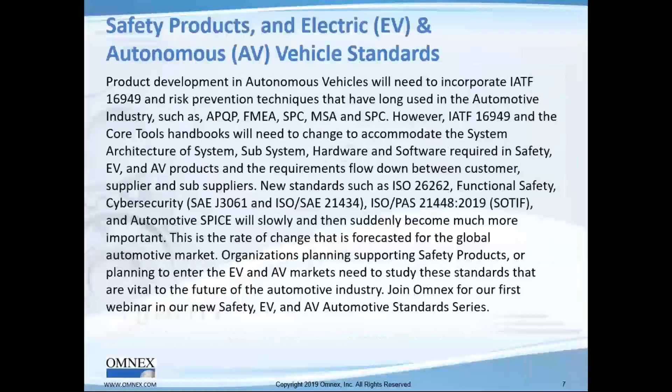As Miles mentioned, we're on many different committees, both ISO committees and many different automotive companies, and we pride ourselves in being part of all the key standards development happening in the automotive industry. So you can divide this presentation into two halves.

What I'll try to do is talk to you about what is happening globally and what is forecasted to happen globally in product safety, in products that have safety in it, electric and autonomous vehicles, and then we'll touch on AV and EV basics so that we understand this product, so you understand a little bit more why cybersecurity is very important, why functional safety is very important, why ASPICE or software becomes suddenly important.

And then what we'll do is spend about half the webinar talking about the standards, what we call the 7 pillars of EV and AV at Omnex. All right, let's get started.

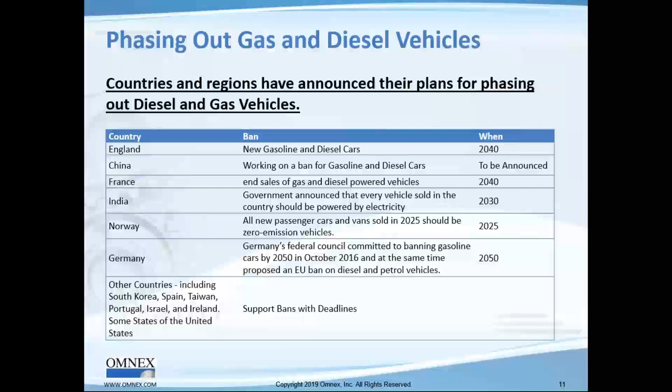Electric vehicles really is what the countries are asking for, and this is what set things off, so much so that you'll see in the news GM has announced they're going all electric, and they've given a time scale, which I'll share with you. Volvo, Porsche, and Volkswagen—as soon as you see GM, one of the largest car makers, and Volkswagen, one of the largest car makers, talk about how the combustion engine is at its very end and they're going all electric, it sets everything else into motion.

So here are the EV targets by OEMs. You can see from BMW to Volkswagen at the very bottom, and Volvo, what they're forecasting.

So by 2030, the thought is that a significant part of the car market will be electric.

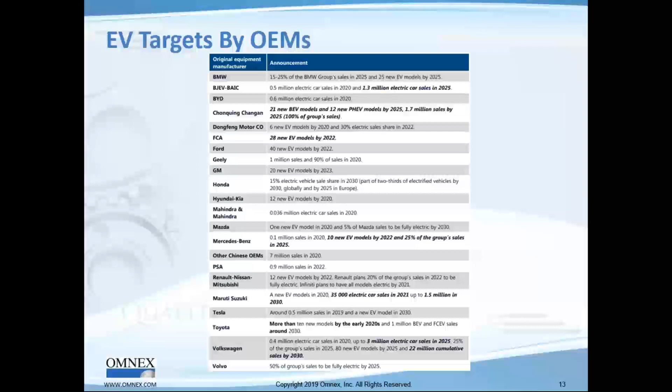Okay, let's move on. What has happened? What is happening currently as we speak? Something that's been going on for the last 10 years, and really it is the amount of safety that's come into the car. Part of that is this announcement between the 20 largest OEMs and the Department of Transportation. It is a commitment that by 2022, all the car makers will be putting automatic emergency braking into the car.

There's a lot of other technology that's coming in, which I'll share with you midway into this presentation, that has already come, and then of course much more is planned to come, which I'll talk to you about. You can also see the idea of backup cameras and the car stopping so that it doesn't run into children or senior citizens.

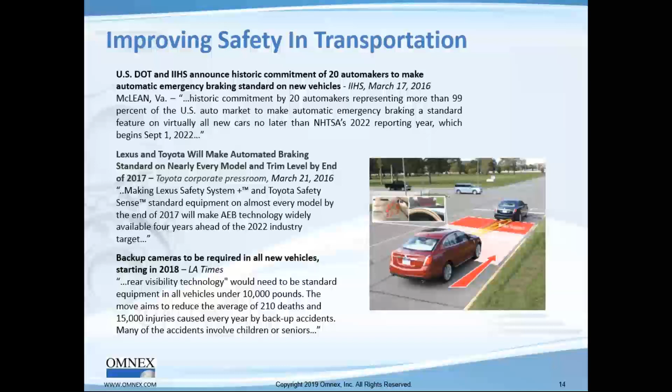So improving safety in transportation has led to a number of what they call mechatronic features in the car, which is the hardware and software. So which then leads to this slide that talks about the content of the car going from about 33% to about 50% of the car being hardware and software by 2030.

Do you see this? You see how it has crept up on us. In fact, I was doing a lot of work in the semiconductor industry, and it was slowly adding on more and more software. So much so, I thought the scope of, at that time, ISO TS 16949 needed to say hardware and software. And then, of course, we all had to audit software as a product in the ISO TS 16949 audit at that time.

And that's what's really happened in many of our organizations, and I have many good companies listening to my talk here today. In all your organizations, where we're doing quite a few ASPICE assessments, we're finding software is a little bit of a stepchild. It is outside the purview of your new product development process. Well folks, hardware and software is here to stay, and the headcount is going to keep on increasing. So I would imagine by 2030, half the organization will be hardware and software.

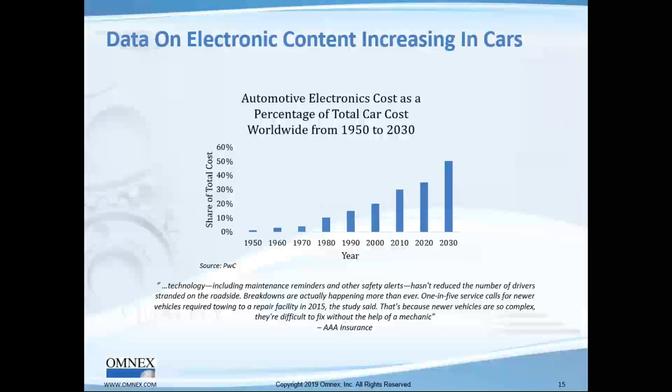With hardware and software becoming larger and larger, and especially software, and I told you it is really very neglected, you talk about distributed development. We have hardware being developed in one part of the world, software being developed in one part of the world, the testing happening in a different part of the world. No wonder we're having so much software failures.

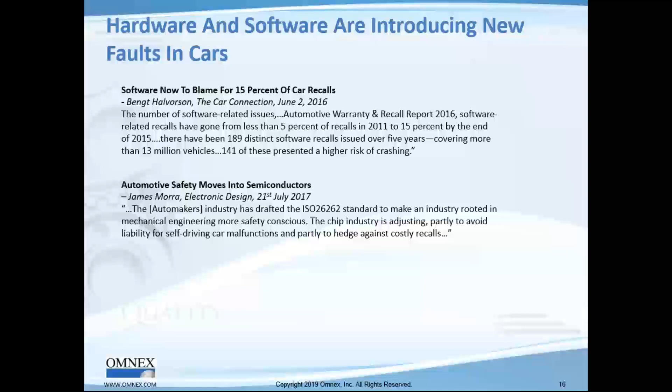And verbally, talking to the OEMs, some of them tell me up to 50% of the warranty today, when they look at the root cause, it really goes to software.

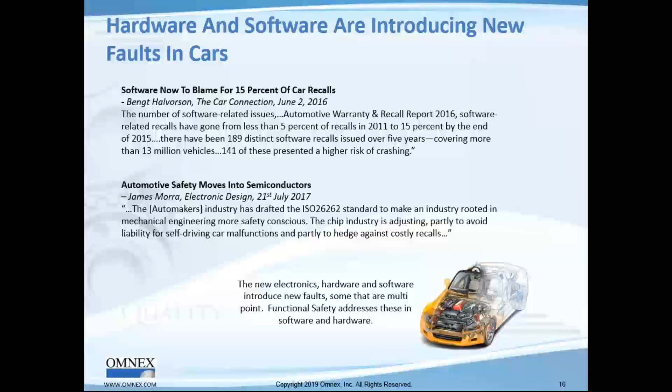So in terms of failures, what we're talking about is mechanical failures with pretty much single point failures. With the advent of hardware and software, suddenly you're going to be seeing what is called multi-point failures. Something that you may not see by itself, when you put it together with something else, you'll start seeing multi-point failures, where if this happens and this happens, then it'll fail. And so that's why we have new tools coming into the automotive industry, and hardware metrics, to handle these multi-point failures that we didn't used to have as much of before.

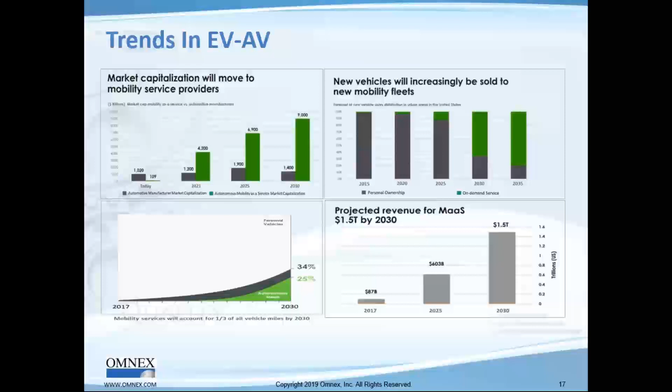So what will happen? First, you're already seeing electric vehicles in the market. You're going to see more and more of the electric vehicles in the market. And at some point, cars will go autonomous. Even if we go level 4 autonomous, I think it'll lead to what is called MAAS, or Mobility as a Service. I took this out of, so currently Omnex is presenting in a number of autonomous car conferences, and we're participating in it because we want to be at the leading edge of the changes that are going to happen. And it's huge changes that are happening.

So I took this out of one of the presentations. It's in the bibliography of my bigger paper. But I don't quite believe the amount of penetration is as much as they claim, as you can see here.

This idea of new vehicle sales, where they're saying about 33% or so is going to be on-demand service, using an Uber or a Lyft, where people won't own cars. The idea is, if you're able to call up a car and everything happens automatically, they'll dispatch a car without a driver that sits at your doorstep, and you might use that car for the next 2 hours, and then give it back.

What this presenter was trying to show is that the market capitalization, or the availability of capital, is going to shift slowly from the black, which is the car makers, to the mobility as a service provider. Yes, indeed, this is going to happen, but the speed depends on whether we can get to level 4. I'll talk to you about SAE level 4 in a second, and you can start seeing things like this happening. So there's a lot of change going on.

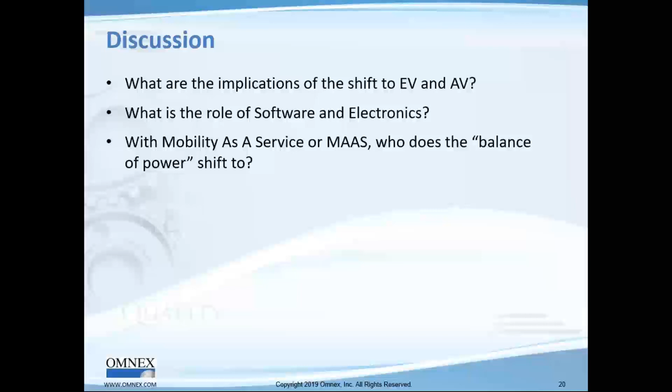But all of you need to be thinking the same. What are my competencies? What are the new competencies? What do I have? Is my background and my competencies sufficient? How do I change? What will be the balance of power? How will things shift? They're already telling you the market capitalization is going to go from the manufacturer to the MaaS. Need I say more?

How about the supply chain? Folks, I haven't talked to you about the standards, but the standards require—we already knew in mechanical cars with some hardware, mechatronic systems, we needed to keep in concert. Many of the problems happening are because we don't know how to do new product development with this distributed design and suppliers globally. In fact, we helped this large electronics company, a well-known icon, come up with the automotive platform, looking at all the places that needed to implement automotive standards just for this one platform.

Think of it as a couple of different circuit boards and a bunch of semiconductors put together. They had 300 different sites involved. I kid you not. If you're going to have 300 sites involved with doing hardware, software, and systems, the supply chain is very key. We need to take a good look at our supply chain—in this case, the design—how just a design is being done. Forget hardware and manufacturing right now, just thinking design.

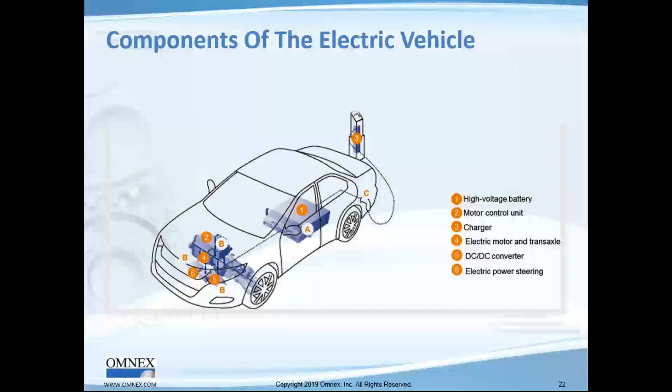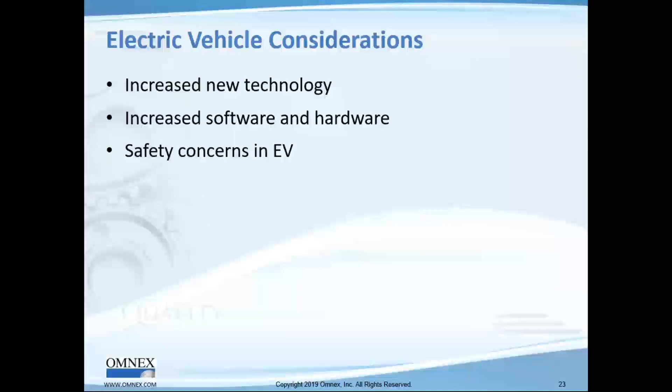DC/DC converter, electric power steering—and of course what this brings in is lots of new technology, increased software and hardware, safety concerns in the electric vehicle, cybersecurity concerns. The cybersecurity concerns come in as soon as you offer internet in the car, as soon as you connect via phone, as soon as you have software updates to the vehicle. All of these suddenly bring in cybersecurity concerns, supply chain concerns, which I already mentioned to you.

All of us leading to a number of functional safety issues, right? And these are some of the common functional safety issues: unintended acceleration—you understand an electric car can accelerate really rapidly—electric shock. In fact, the voltage, as...

We have done a number of electric vehicles and battery management systems here at Omnex. As the American plant manager of a Chinese battery manufacturer mentioned to me, showing me his 5 or 6 prototype batteries and battery management systems, he said, 'Chad, any one of these could take out a city block.' So we have these vehicles with that kind of power running through them, and we have to be aware why functional safety is very important.

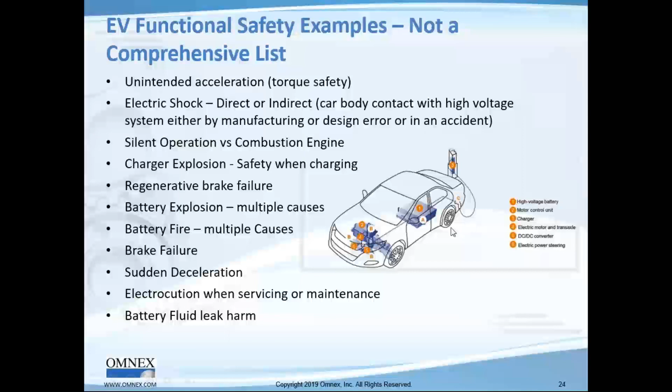Great, so let's continue. Next, folks, I had to be very economical here in what I add, only because it's an hour that we have. So let's quickly walk through—we have many key slides on the autonomous vehicle basics.

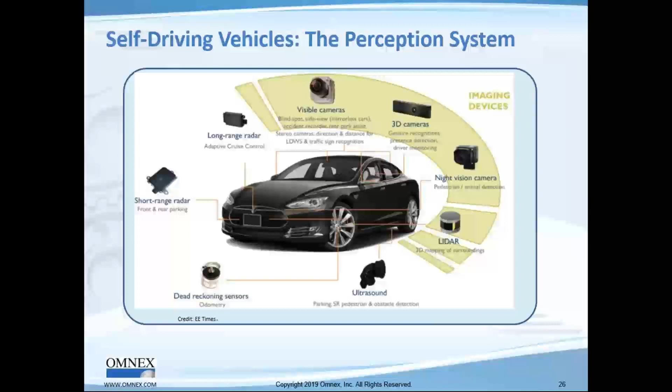Number one, we need to know that the self-driving vehicle has many different hardware and sensors—radars, cameras, lidars, night vision, ultrasound, dead reckoning sensors—all of this so that the car can go from level 1 automation to level 2, level 3, level 4, level 5. So here I've been referring to this SAE automation levels.

As Juan pointed out to me a few weeks ago, it doesn't say autonomous car—very carefully, the SAE committee called it automation. But of course, if we said automation cars, you wouldn't understand, so we call them autonomous vehicles. So what does it mean? We'll just say this as no automation in 0 and full automation in 5.

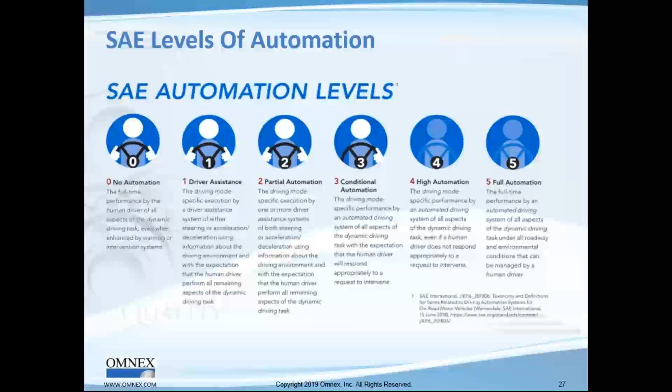I think we understand the extremes. How do we understand what's in between? This is a good picture to keep in mind to understand the difference between level 1 to level 5. The first one is that picture of the steering wheel, right? That's the one end, the driver is steering.

As soon as you hit partial automation and conditional automation, the car is doing self-steering, okay? Maybe at least even for a few functionalities. Then, of course, as it goes from level 4 and level 5, it is really steering by itself.

And then, who is seeing? Is it the driver or the vehicle? When you hit 3, the sensors and the cameras and the radars are good enough to manage by itself, but still, in the end of the day, when there's a contingency, which is plan B, the driver takes over, okay? And when you go to 4, you have the car doing all 3, and then level 5, all 3.

So what's the difference between level 4 and level 5? We'll use a term, it's the scope. It's the ODD. And ODD stands for Operational Design Domain. Okay, it's the operational design domain.

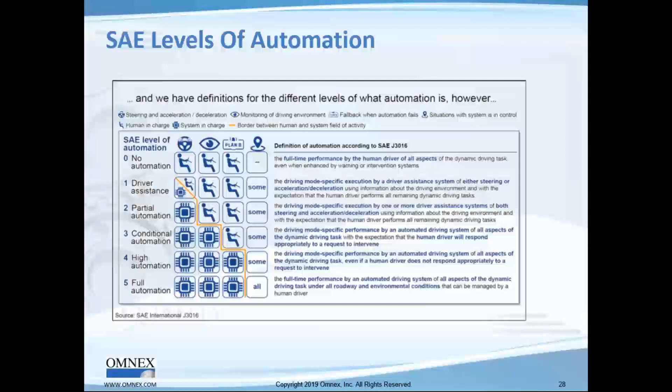And soon as GM is able to succeed in that, I think you'll start seeing things like the MAAS, or the Mobility as a Service. Soon as you do that, you can have these cars on one end, have people use them during the highway and then take something like an Uber or a Lyft from the end drop-off point to their homes. You can start seeing that. And then, of course, level 5 is when truly you'll start seeing mobility as a service.

Another way to look at this picture is to see the amount of hardware and software that is needed as time goes by. Of course, this is a slide looking at today's technology. I am certain there will be breakthroughs in the future, and maybe instead of 32 different sensors, cameras, radars, we'll go to much less in the future.

Okay, and I think Juan, we were discussing LiDAR being the most expensive of that, and how Tesla doesn't use any LiDARs at all. Right? That's right. The state of the art of LiDARs is probably the least advanced as compared to cameras and radars.

And there is still a lot of room for development and innovation, like Chad just mentioned. And I believe that in the next 5 or 10 years, we're going to have completely new redesigns based on just these lidars, because it's very new. Lidars are very new, in fact, in automotive it's new, but in other areas they're not that new. But you're right, in automotive it's totally new.

Folks, Juan is an expert. He's done a lot of work in hardware. And Juan, if you look at our 5-day certification course, we're coming up with a hardware, part 5, version of it. And the case study we're using is actually a LiDAR for functional safety.

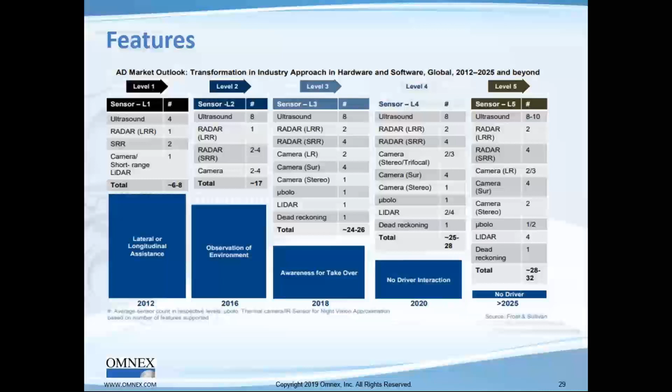All right, folks, let's move on. And this is the last slide, and maybe I've lost a few minutes here from our standards discussion. This is sort of the trajectory. You can see in 2012, we had things like blind spot detection, lane change assist, forward collision alert, and so on. And I get a good chuckle out of it.

So you can see here also level 2 in 2016. I don't see the automated parallel parking that I saw advertised a few years ago. In fact, I told you I just bought, I won't tell you which vehicle, top of the line vehicle, this car, and I looked for the parallel parking, automated parking.

They said they had it a couple of years ago. It never worked that well. And so this great car company... Really?

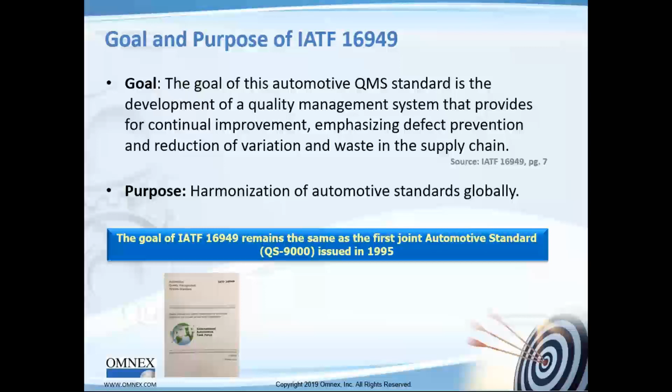4 out of the, we'll talk about 5 out of the 7 standards. Starting with IATF, all of you know the IATF. I'll just say this, with the advent of the new standards, IATF 16949 is going to have to change. How we manage suppliers needs to change. How we do change management needs to change. Traceability will change. Configuration management will come in, and so on.

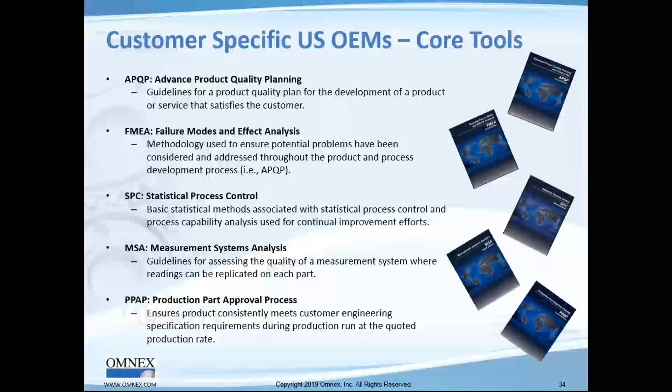And what else needs to change? The APQP and the PPAP processes will change. In fact, we are giving a number of presentations on this topic. Those of you interested in looking at where new product development is going with all these new standards, please email Miles, and we'll be happy to share that with you, including a white paper.

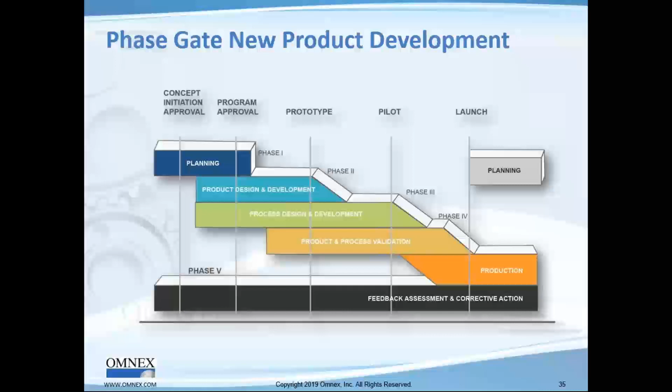So this APQP process, fundamentally you can see here, we never thought about the system architecture of system, hardware, and software in phase 2. We are not aligning, we don't have requirements flow down. We don't have testing flows up, or the idea of the V. I don't have time to talk about that in this presentation, but Omnex recommends satisfying the V using the linkage, of course taking the requirements into a DFMEA, coming up with the test requirements, and doing the testing in a DVP&R. And of course, folks, the requirements have a decomposition, so requirements flowing down and testing flowing up.

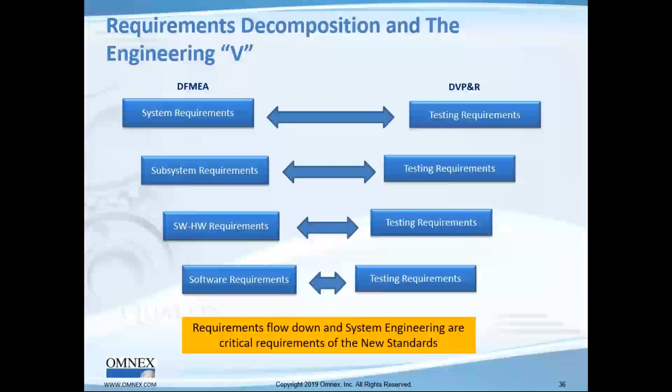Oh, I have to make a couple of points here. The idea of the architecture of system, hardware, and software in systems engineering is a critical requirement of these new standards. All right, let's get down then to talking about these 4 of the new standards coming out.

As I mentioned to you earlier, software and software failure is a big deal. So the industry is looking at Automotive SPICE, which is a framework for designing and assessing software development processes. And folks, I just did an assessment last week, and let me give you some thoughts here.

I'm going to say this company had maybe 150 requirements for this very key feature that they're adding into the car, and it's going into some of the top name brands, one which has already got it, the other one which is going to start first quarter next year. They had to redo half of the requirements, because when they went and looked at the alignment between stakeholder requirements and system requirements, they found it was inadequate.

Number 2, when they went to the testing requirements, 46 out of maybe 120 test cases had to get updated. So you understand then the implication, that's only one very small part of ASPICE, but the idea of the alignment, the review of the requirement, the review of the test cases, all of which are base practices, are part of the journey of trying to have better quality in software.

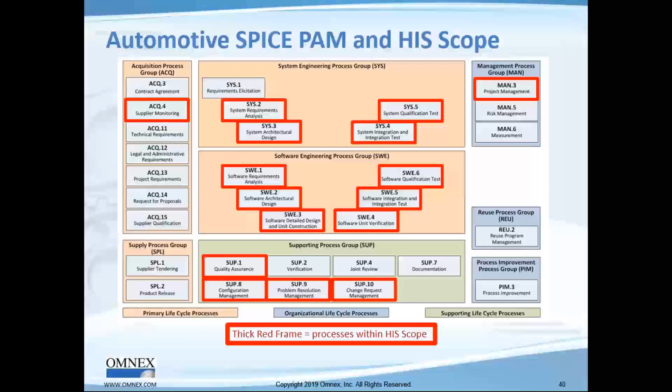All right, so let me explain this picture. There are 32 processes in ASPICE, and 16 of them are what is called the HIS scope. So typical OEMs are asking for the HIS scope and at least a level 2. Everybody would like to see level 3, but at least a level 2. So level 1, level 0 is nothing.

Level 1 guarantees those base practices. So there are something like 6 to 9 to 10 base practices for each of the processes, which you have to implement, and assessors come and assess. And then as soon as you put down performance management and work product management, you work to a level 2.

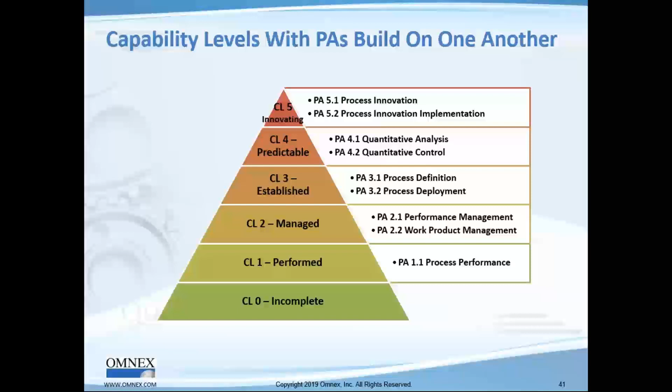Level 3 is when you have a standard deployment that will be tailored for every project in the company, you're at level 3. Okay, so up to a level 3 is what we have to strive for in the automotive industry. But right now, start with a level 1, move to a level 2 after that.

So that's ASPICE. What else do we have? The standard functional safety 26262 that came out in 2011. Omnex has been working with the standard since about 2009, and we did a whole e-car in 2009, and we've been doing a number of different projects in 26262 since then.

What is 26262? Well, they opened the scope of 26262 in 2018 to include buses and motorcycles, and they took the weight limit out of the automobile, but the scope is still E&E, okay? Electronics and electrical.

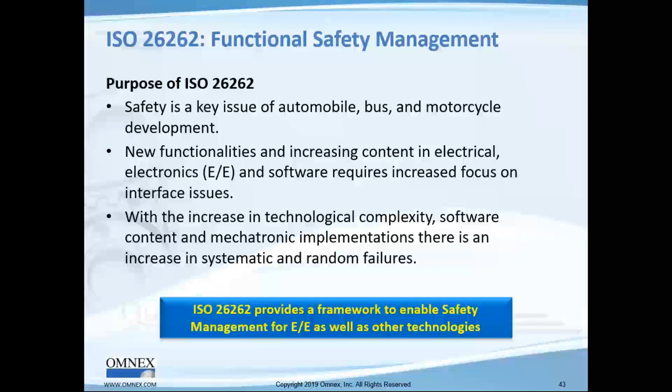And it's looking at safety. It's scoped down to safety, and the whole idea is with the increase in technological complexity, the software content and the mechatronic implementation, there's an increase in systematic and random failures. So this E&E-focused 26262 addresses hazards caused by malfunctioning behavior.

I will talk to you about SOTIF soon, but just understand it. You do a HARA, hazard analysis and risk assessment, and you understand the hazards. Out of that, you identify the ASIL levels and the safety goal and the safety requirements, and then it goes on. Otherwise, pretty soon I'll tell you the whole standard with the functional safety concept and the technical safety concept.

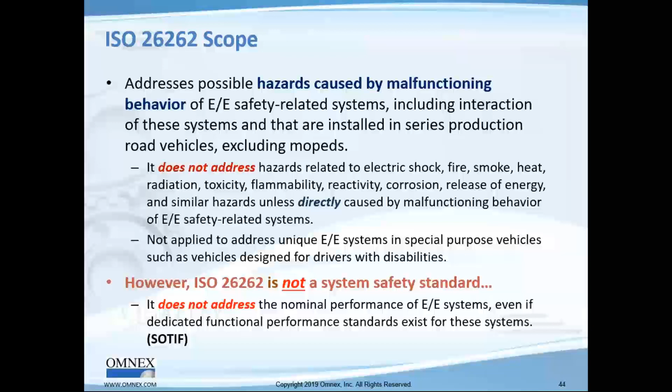All right, so 26262 is really part 2 and part 8, aligned with IATF 16949. Part 2 is general requirements, but the general requirements are things like competency management that goes with IATF. There's audits, called confirmation measures, okay? And it also brings in the safety case and so on. Very important requirements in part 2.

Part 8 has support processes, and the supplier management is called DIA, or development interface agreements, okay? So part 2 and part 8 align with IATF 16949, and then you have a concept phase where you identify the ASILs and the safety goals and the safety requirements.

From there, you have to identify the technical safety concept of the system in part 4, hardware in part 5, and software in part 6. And of course, ASILs can be decomposed. Pretty much you don't like ASIL Ds because ASIL D has such a high requirement in terms of hardware metrics. Oftentimes we have to do what is it called, ASIL decomposition.

You'll have to end up doubling your design—well, there's a cost because you'll have to put in a redundant system to get the ASIL D requirement. So frequently you do decomposition, at least to ASIL C, that we can do with less expensive parts. Of course, if you have no ASIL, it's cheaper versus ASIL C.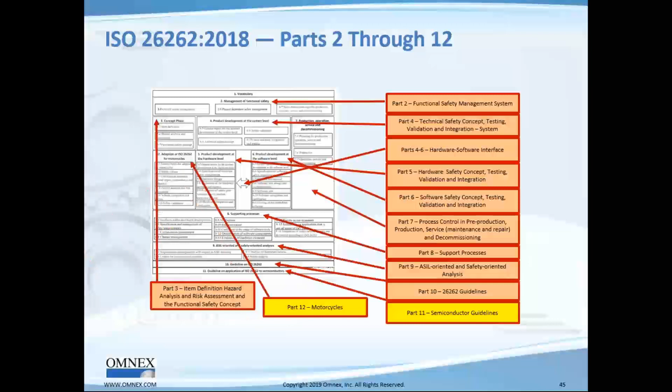Next, we have SOTIF. SOTIF deals with functional insufficiencies. Let me give you a good example in my new car.

Yesterday, I put my key in my briefcase, and it's got a kick sensor, and I did the kick sensor motion and the trunk opened up. So I put my briefcase in, I closed it, I couldn't open the door. Then I come back and use the kick sensor and it will not open. It did not sense that the key is inside the trunk. It's a functional insufficiency.

My Cadillac, which I drove and replaced with this new car, the flagship of this great company—the kick sensor designer had not designed for that. And I panicked because I didn't know how to get into my car. I actually called the dealership, and luckily I found a person who helped. Long story short, I got it opened, but you can see the kick sensor designer had not thought of this scenario. This is a good example that it's not just for the autonomous car.

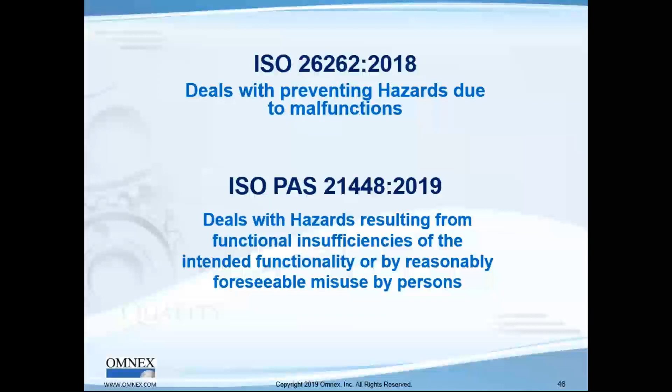You have to think this way for every little design, including a kick sensor design. And there's not only functional insufficiencies, but it could also be misuse, somebody trying to misuse it. So you've got to think of all that using scenarios. And so there's the idea of a scenario—a scenario is a set of actions.

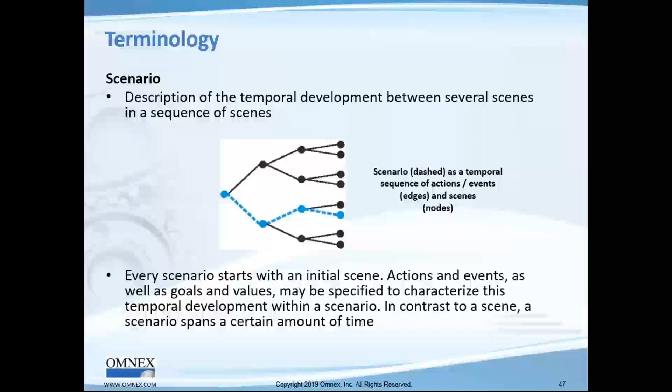In my scenario, the trigger—let's look at this. Every scenario starts with the initial scene. In my scenario, the trigger event was that I put the key in my briefcase, and then I put that into the trunk. It was not a safety event, but you can understand it could have been, if it was a safety functionality, it could have been a safety event.

Here's an example: when operating on a highway, a vehicle's automated emergency braking, the AEB system, misidentifies a road sign, thinking it's a lead vehicle, and it brakes all of a sudden with the greatest emergency. Of course, what is the safety issue here? Not only to the driver, where maybe the airbag goes off, but also could be a rear collision. Okay, so you understand what scenario is.

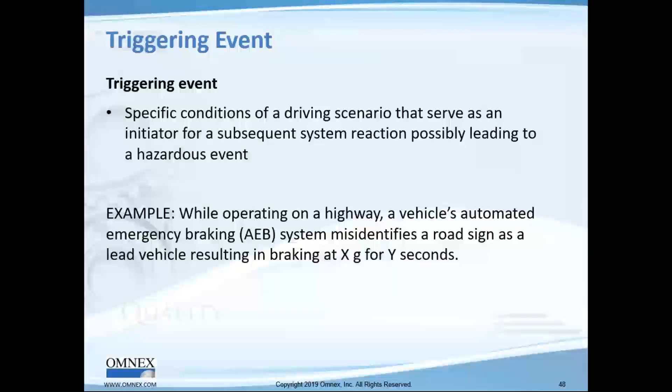All right, next we have 21434, the one that Juan is on. But Juan, you're also on the SOTIF committee, if I'm not mistaken. Right, yeah. And so right now we have the J3061. There's a guidance standard, but we have folks at Omnex already started using 21434 integrated with J3061.

And what is this idea of cybersecurity? Anytime we're connected, there's a problem. So here it is: network data services, call centers—my car, if I touch a button, I talk to somebody. Map provider—yep, I have that too. Of course, well, there's smart city. In fact, Juan is going somewhere to give a talk on smart city, where everything talks to everything else. So that's got cybersecurity issues.

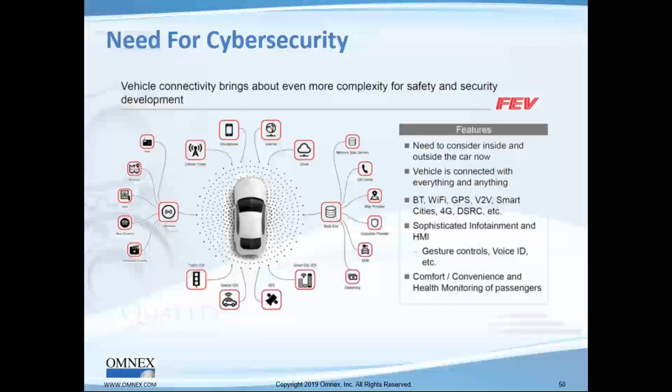GPS, V2V—there's a standard for communicating between vehicles, and of course that has opportunities to get broken into. Cellular, smartphone, internet, cloud—all of these have this idea of a threat landscape where there are organized, well-financed attackers. It could be like that in some parts of the world, who are trying to just cause disruption. As you all know, I don't know what they'll do—they'll hold your car hostage and tell you maybe give me $2,000 or $1,000. That's possible, yes.

Individual hacker just getting in, amateur, insiders. Of course, there could be insiders who designed the car that have got a back door. So all kinds of threat characteristics that could be there that we need to design for.

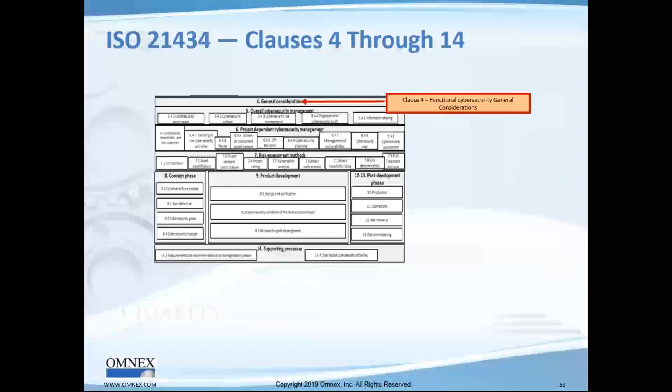Folks, I'm going to go by this. We did this specifically for one customer. So we have the 21434, and I will say, Juan, we know it's a work in process. As I mentioned to you, I like the first picture better than the second picture, but you have general consideration. Clause 4 is like clause 2, that's right. Functional safety, and then you have the concept phase, very similar to the concept phase.

In functional safety, the risk assessment methods, there's one additional, what is it, a vulnerability assessment that needs to be done other than the TARA? No, they have actually more. I mean, the whole thing of risk assessment methods, they list many methods, but this is supporting methods, basically. It's not really part of it. I think if you do the TARA and the vulnerability assessment, that would pretty much be it. TARA is key. If you do the TARA, then that gets you a long ways, but that's not the whole thing.

And then, of course, well, I said concept phase earlier. We have the concept phase in clause 8. We have the product development. This product development has system, hardware, and software, which was clearer in the old picture. And of course, you have validation and verification, as you have to be, because you have the V model also in use here.

And of course, very importantly, as Juan will tell you, the singular most biggest difference is that you have to continue protecting yourself, and you'll have to get OTA or updates to your software. That's right. Go ahead and explain that. This is the reason why, in this case, there are several clauses, 10, 11, 12, 13, which means that in the post-development phases, you're not done with cybersecurity because you need to consider additional vulnerabilities that come into place all the time.

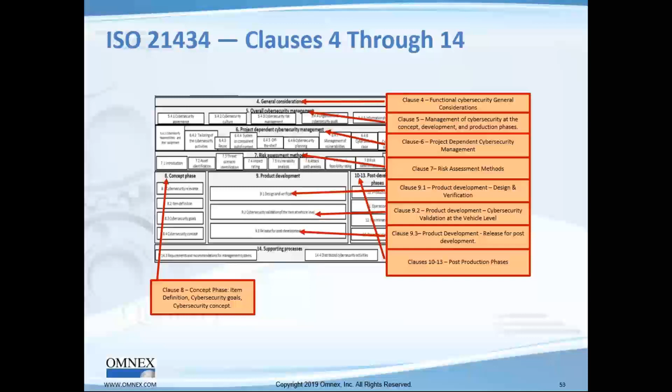Folks, Juan also has written all our cybersecurity courses, and he'll also be teaching them. And thank you, Juan. All right, so here is sort of the functional safety and the idea of the TARA going into the cybersecurity concept. And of course, at the end of the day, everything comes down to system requirements, hardware requirements.

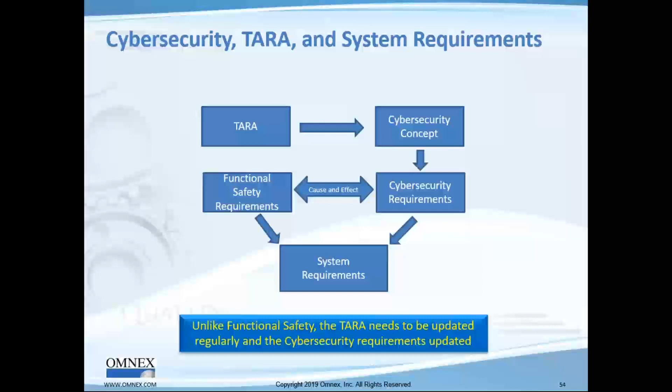Well, system requirements going into just like the functional safety requirements, overall requirements, along with the functional safety requirements, there'll be cybersecurity requirements, and both of them go into the system requirements. And then system requirements have to get decomposed into hardware requirements, and from the HSI, and then also to the software requirements. And there you go.

So what do we know? Juan expects 21434 to be completed, as I have read from other members of the committee, by the end of next year. And tailoring is allowed in the cybersecurity activities, meaning that you can tailor it to meet your project. If a rationale is available, then you can not do something, but you have to offer the rationale why you have excluded something. Correct. Otherwise, they're mandatory.

All right, folks, that is what we wanted to share with you in terms of the EV and AV product safety. Number one, if you've got safety products, if you're designing for the electric vehicle or the autonomous vehicle market, these are the 7 different standards and levers that you need to apply. And we covered 5 of them in this presentation. We have not talked about Agile or really talked to you about the supply chain activities. But let's finish up here with our summary and conclusions.

So folks, the point to be made is that there's a product change from gas, ICE, or the internal combustion engine, and diesel vehicles to EV and AV in cars, trucks, buses, and in countries like China and India, with a big two-wheeler market, also in the two-wheeler market. And many of it is getting mandated by governments and adopted by car companies.

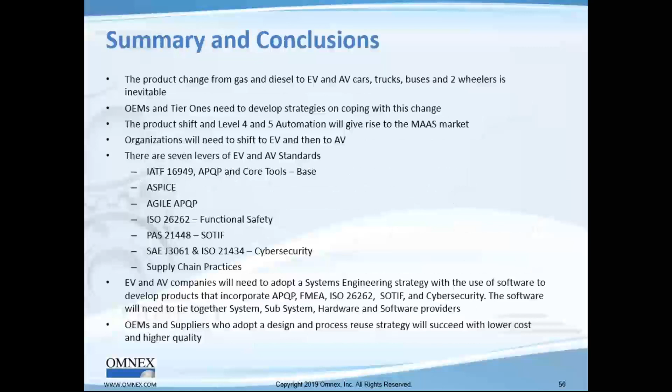Juan, did you want to add any words to this? Well, more than words, I think I'd like to ask you a question. Okay, I'll just do that. Let's do this, let me finish up. Thank you, we'll take your question as the first question. I just want to tell you a little bit.

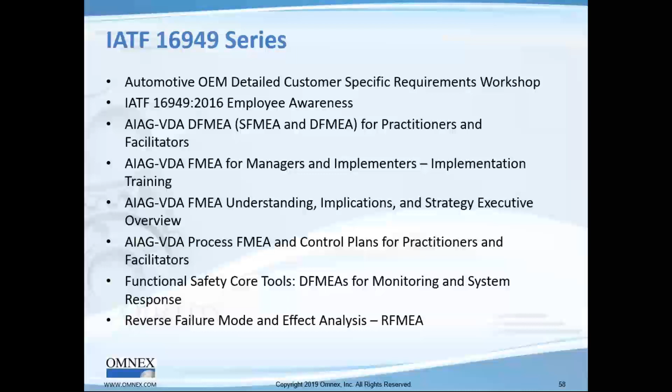We have our IATF 16949 series. Our courses are different because, as you know, we're known to be very automotive. Here's our Automotive SPICE. What we haven't added here is our Intacs. We're offering Intacs, the VDA governing body for A-SPICE. If you want to be a certified assessor, you have to take an Intacs course, and we're offering our first course in November. And we have a SOTIF course, Agile series, and 26262 series.

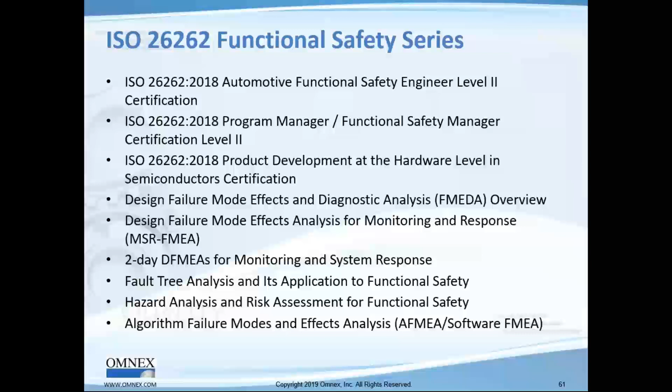We have writing effective requirements, test cases, hardware and software, for 26262. We also have that for Automotive SPICE. And FMEA, FTA, along with how FMEA, FTA, and functional safety integrate and link together. And then, of course, a Cybersecurity series that you helped write. And some general classes from a systems engineering and basic classes as an introduction to engineers for autonomous and electric vehicles. And of course, the supply chain practices.

And we have software. We have AIAG-VDA FMEA software and 4th edition software that helps you do the V model, and software that integrates functional safety, APQP, and cybersecurity. With that, let me move on to questions. Let me have Miles print out the questions we have, and I'll take Juan's question as the first one. Go ahead, Juan.

One of the main problems organizations will have in the future will be integrating all of these tools and all of these levers. How do you envision solving that problem?

Yeah, so I'll tell you what companies are doing. Large OEMs are creating, of course, they have the product design group, they're creating a parallel cybersecurity group, and a parallel functional safety group. The functional safety people are doing the functional safety, the cybersecurity people are doing the cybersecurity. So what would we say at Omnex? We would say fundamentally that is not the way to satisfy these standards. Yes, there is a role for folks who specialize in it, but we need to have it integrated into the competencies of the engineers working there.